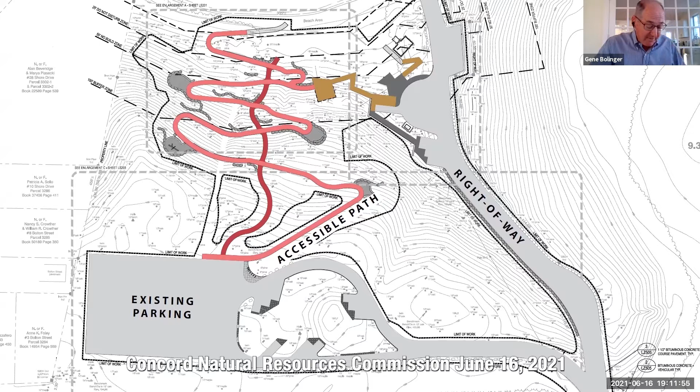We've converted all of the DMHs that are along the main entry drive, which is labeled by right-of-way on this particular diagram, to catch basins with deep sump and hoods. And this is providing additional TSS removal. We've revised the boardwalk alignment and the overlook in order to avoid additional trees. We'll talk a little bit more about that.

I'm sorry, Gene. Gene, if you can just speak up a little bit, it's a little difficult to hear you. Okay, very good. Gosh, I feel like I'm shouting, but I'll try to do that. Okay, and please raise a hand or just interrupt again if I'm speaking too softly.

And then we're mitigating whatever work that we've been identifying in the 25-foot zone, the 50-foot zone, and of course the 100-foot buffer zone, primarily through additional planting of trees, both evergreen and deciduous, and understory shrubbery. And then I think everybody's aware that we've made some fine tunes to a really, really robust stormwater management system in relation to some of the comments that we've had from the town engineering department.

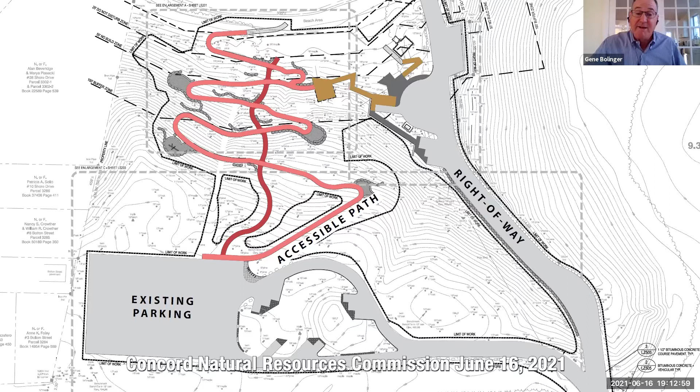So in regard to some comments from engineering, everything had been resolved to their satisfaction with the exception of 4 very minor items. And we've been in contact already with responses on these 4 very minor items, and I think that we're in complete alignment now. One of the questions was whether in fact the plans were consistently showing the deep sumps with the hoods. And in fact, they are. So we've clarified that.

And there was a comment about the stormwater capture structure, number 1 versus number 2. There's a little bit more water that's actually flowing into structure number 2. We've adjusted our calculations in response to that, and the structure is able to accommodate that in very good order. And then there was an underdrain referenced on one plan. It was a rogue underdrain. It's not part of the project. It's being deleted, and that was in response to a question from engineering.

And there was an indication from engineering that we should include, again, a sump in the most westerly trench drain that's shown on the site plan. And in fact, we are doing that as well. So those were comments from engineering that came in just a couple of days ago, June 14th.

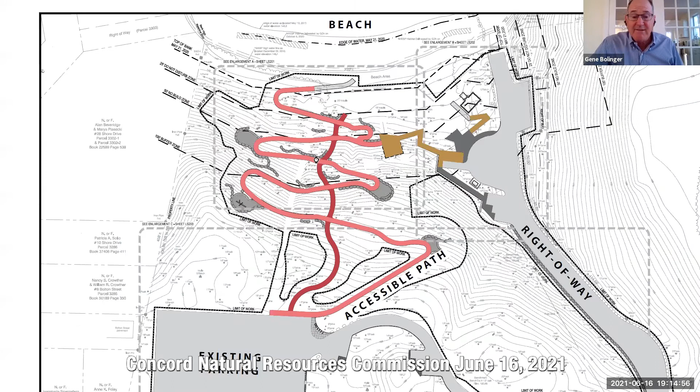And then Delia, you shared a couple of thoughts just yesterday with us in response to the latest information that had been provided. One of them was about the boardwalk encroaching a bit into the 50-foot no-build zone. And in fact, we are encroaching by 23 square feet. It's not requiring excavation. And we're doing it in order to avoid trees, get the length of ramp we need to accomplish the grades we need to meet in order for this to be ADA compliant, and to have something that's aesthetically compelling. So in fact, we are 23 square feet into the no-build zone. And we're proposing to mitigate that with some additional planting.

And you also made a comment about the lifeguard shed. In fact, under current conditions, that is also in the no-build zone. We were shifting that a little bit to accommodate the geometry of the boardwalks, and a little bit more of that is in that zone under the proposed condition. We're not considering it a permanent structure. There's no foundation. It rests on concrete blocks, and it's within an area that's really beachfront with little or no disturbance resulting from situating the structure in that particular location.

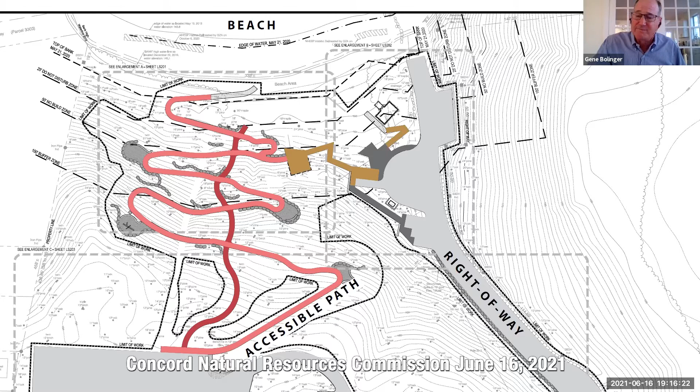Are people hearing me okay? Should I continue on, or should I stop the flow for questions? I was going to speak for just a couple of more moments. I think it's fine. Okay, very good. It's one of the things about doing this virtually. It's hard to read people's expressions and see if anybody's raising a red flag or anything like that.

Excuse me, how many trees total will be cut down in this current plan? Please.

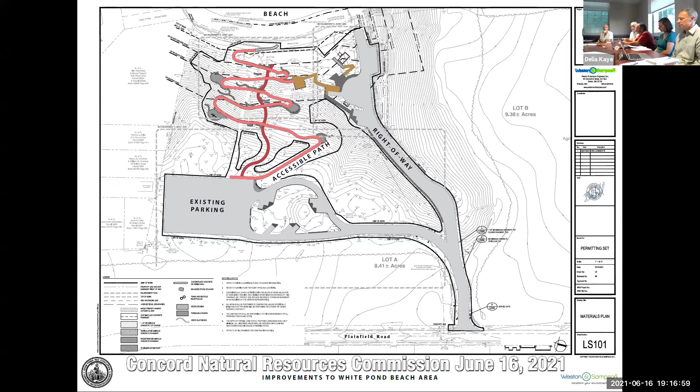Let's save questions until after the presentation and the commission has had some comments. Oh, I thought he just offered to allow us a question. Could I use this pause time for questions? No, just if the commission or Delia had a question. Forgive me, I was speaking to the commission. Excuse my interruption. No questions.

No problem. Okay. So on June 7th, we actually submitted the formal waiver request for the 25-foot no disturb zone, the 50-foot no build zone, and the 100-foot buffer zone, indicating the impacts within those areas and proposing that the mitigation be in the form, again, of a very ambitious and aggressive planting program that includes native deciduous trees, evergreen trees, and understory shrubbery.

And then we also, on June 7th, submitted a rather detailed response to letters or emails that had been received from multiple abutters to the White Pond swimming amenity. And a high level summary of that: we've provided information in regard to the boulders that are being used. And yes, these boulders are being placed within the zones that fall under jurisdiction of the Natural Resources Commission. But they really match boulders that are out there under current conditions, if in fact they're not actually boulders that are already out there.

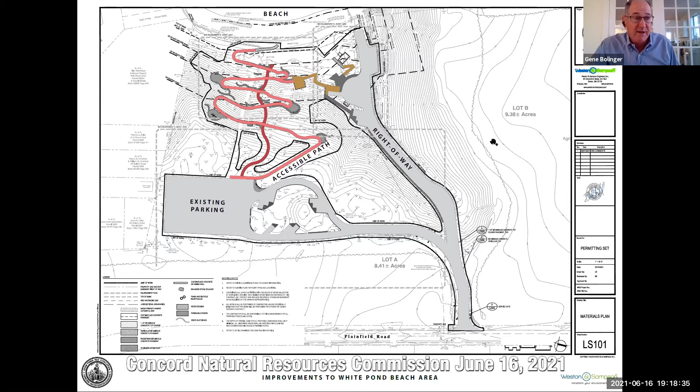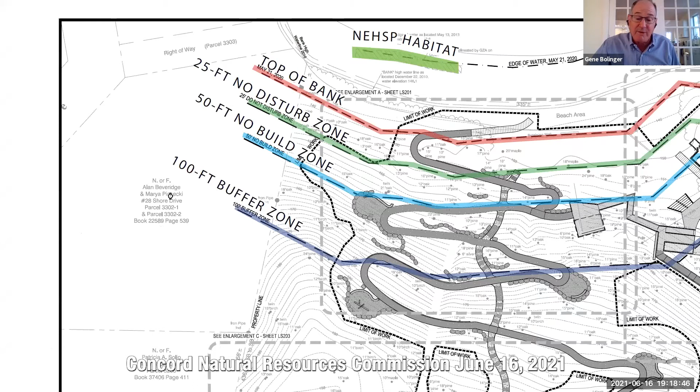There was a suggestion to change from a fixed canopy to a lighter canopy. We've gone to a fabric canopy. We've adjusted the railing system on the decking, the boardwalk system and the overlook so that it's not a heavy wooden rail system, but a much lighter cable style railing. We have adjusted the boardwalk as requested by multiple residential abutters in order to avoid the need to remove additional trees. So we are down to the removal of 9 trees across the breadth of the project improvement area.

We've modified a stone retaining wall that's shown very central to this view right here, that trapezoidal shape, by installing a bench on the front face of the stone retaining wall. So it reduces visual impact and provides value in the form of seating. We eliminated a staircase off of that overlook as one of the abutters suggested. The staircase is provided adjacent to the drop-off area. So those were some of the changes in response to the abutter questions.

And then just today, we received some questions from another abutter. There were 4 comments. One had to do with the color of the asphalt pavement. I will just say that asphalt pavement fades very quickly. And in our opinion, based on leaf litter and so on, it's going to blend into the ground surface of this woodland landscape quite readily and in very short order.

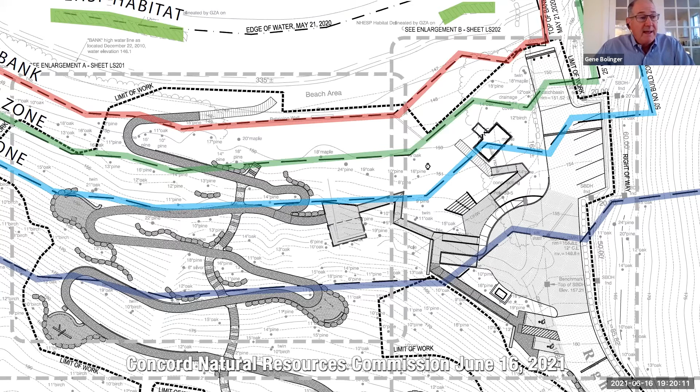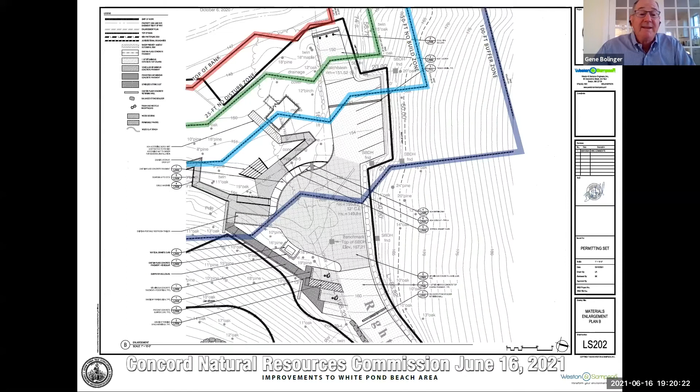There were some comments about planting within the jurisdictional zones and a suggestion that some of the trees we were identifying may conflict with existing vegetation. Lainey, can you go to the last plan in this set? That is the landscape plan. And maybe zoom in a little bit towards the beachfront. One of the things you typically do on a construction set of drawings is indicate that the contractor or landscape subcontractor is required to stake the locations of all the tree and shrub installations.

That allows you an opportunity to shift the location slightly so that you're not immediately adjacent to another tree or a sapling that wants to be retained or a group of shrubs. So I would offer that as a response: if we have some amount of flexibility, I would take lead from you folks in regard to when we would report back to you on having to adjust some of the vegetation installations. It's impossible on a landscape plan of this nature to pinpoint precisely every location of every piece of vegetation being installed. So you have to reserve the right to shift slightly while maintaining the intent.

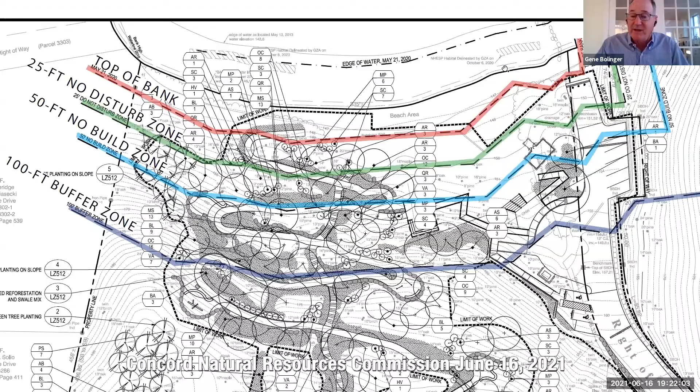And I think there was also a suggestion that some of the groupings of understory vegetation be shifted in order to better control views off premises to private abutter properties that are located to the left on this drawing. So I will come up for air now because I know that was a lot of information. Kate, is there anything you think I'm omitting that you'd like to add at this point, or turn it over?

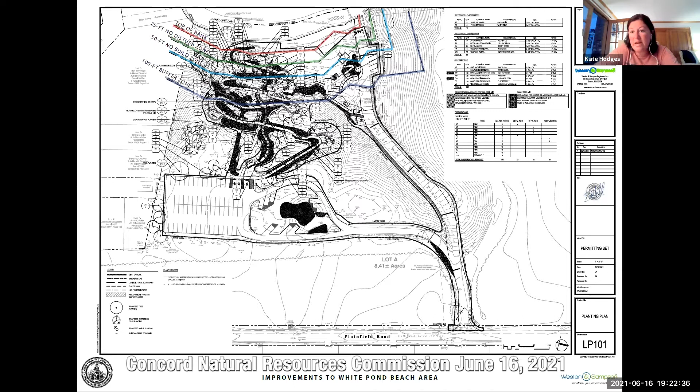No, only that, just to kind of couple back on what Gene said, I think more than probably any other project that I've worked on in the 7 years being in Concord, we have really listened and tried to do our best to have the lowest impact as far as aesthetically and environmentally that we can, while also being compliant both with code, the Architectural Access Board and ADA,

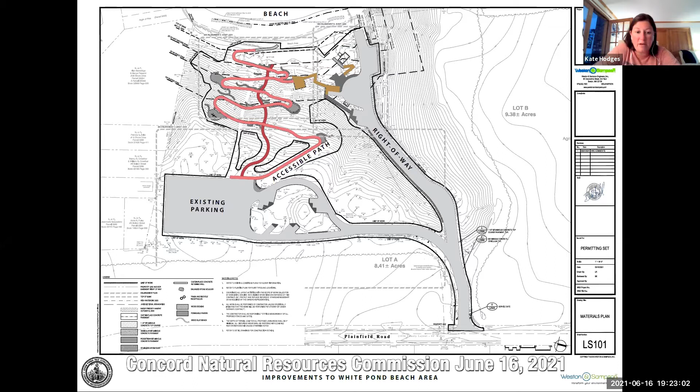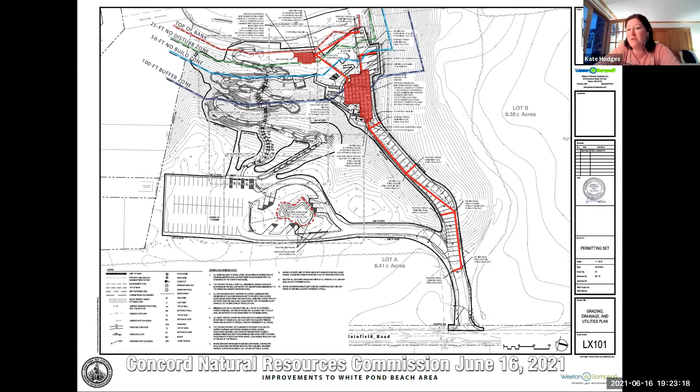and then really trying to create the most robust stormwater management system, which we really hope will reduce the occurrence of the blooms that we're currently having, but also all of the other things that happen in and around the pond that really work to harm the resource area. So the entire plan is with that in mind. We're not trying to have anything that is more showy or robust than what we have, but we also want to make sure that we're being responsible for the property. Okay, thank you.

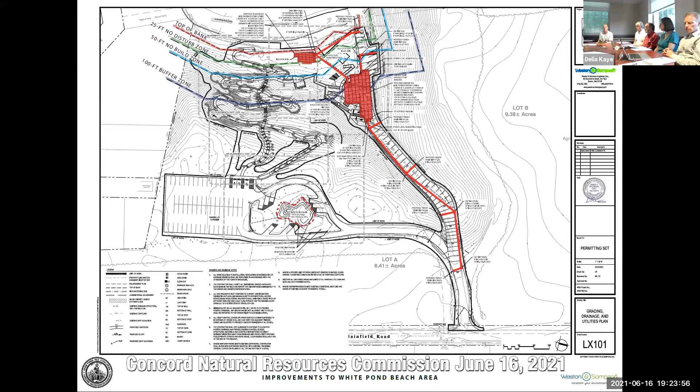Well, I guess I'll just kick it off with a quick comment, really for the commission, in regard to that 50-foot no build zone. As I understand it, top of bank is somewhat artificial, if you will. I know Delia explained that's really how the code reads, establishing the top of bank, but it seems like it does push it back further than it may normally otherwise be in terms of the point of water.

So it seems like the incursions into the 50 by that 23 square feet and partially by the small building there seem, at least in my eyes, given all the benefits of the project, and that top of bank location where it might be further towards the water, acceptable in terms of just balancing everything here. I just wanted to solicit the commissioners in terms of their perspective on that.

I'm sorry, could I just say something? Sure. So we took it upon us, honestly as an educational exercise for myself, Ryan, and the rec department, to try to measure what we thought was the water line over the past 2 years. And we haven't actually come within 10 feet of the top of bank during the summer or swim seasons. Now that doesn't mean that we don't come into contact with that during the rainy season or when snow and ice comes there. We certainly haven't done our due diligence in mapping that out,

but the idea was the top of bank comes where the average is, so that if you were in an assisted device, either a wheelchair or some type of walking device, you would be able to reasonably get to the water's edge. So I think it just speaks to your point, and I wanted to let you know that we've tried to do some homework to figure out what is the average that it comes up during the summer months, and that's where we've been at. Thanks, Kate. Appreciate that perspective.

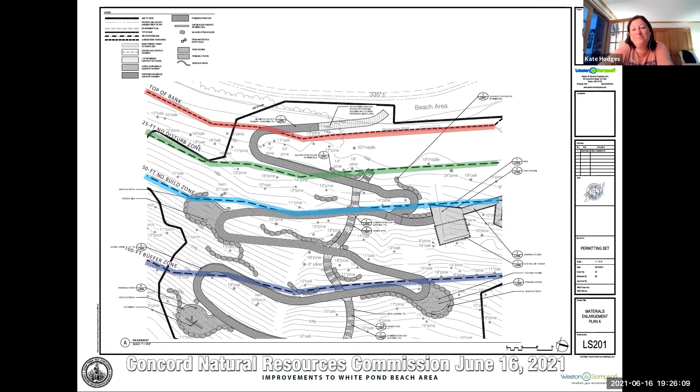In that regard, I don't think it's overly germane to get in the habit of having the petitioner go out there and tell us where anything is. Right. And no offense, Kate, I have no objections to what you're asking for. None taken. I think the overall benefit to the public ought to be brought into play here, and there's an overwhelming need to have this done, and I think we ought to just justify it along those lines. I don't know if a waiver is needed for this. It was provided, it's in there.

Yeah. Then I wouldn't want us to vote hanging our hat on, well, our regulations say it starts here. Sorry guys, it starts here, and we've got 24 feet. I don't think we're gonna live or die on 24 feet. I agree. And the public benefit is certainly worth saving. If they've saved a couple of trees inside the 25, we've come out ahead. So I'd rather go that route as far as justifying our vote. Yeah, I don't know how others feel, but I agree. I think the public benefit is the overwhelming factor in my mind. No concerns from me. Me neither. Good, Gary. Okay.

I didn't have any other particular perspective on it. It seemed like he did a nice job responding to the commentary, whether it was from Public Works or ourselves or abutters. At least I can't speak to all the abutters, but it certainly seems like you addressed a fair amount of those concerns. So, the other thing I didn't quite get is planting the shrubs and trees.

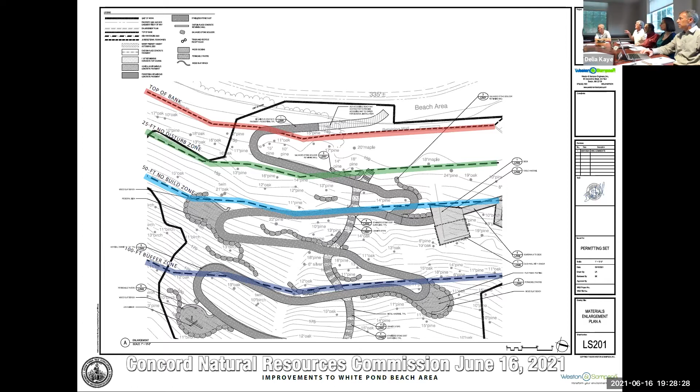Any other comments from the commission? Okay, we'll turn it over to any public comments in regard to this application. Delia, do you see any? I do not, but Jean, if you can stop the share on your screen. Nick had a previous comment about trees. Remind him now is the time. Thanks, Laney. Okay. I have a comment.

Yes, Carmen, please. Carmen Jacquier, 38 Shore Drive, formerly of the White Pond Advisory Committee. I really appreciate how you have adjusted down by the water with the pavilion and the walkways and the elevated wooden walkways and saving those large trees. That's really great to see. Thank you, Kate. You're more than welcome. Happy to do it. Any other public comment?

Nick Johnson from 38 Bolton. Yes, Nick. So, just from my understanding, is the commission the deciders on how this gets done? The public is just relying on them? This is Delia Kaye, Natural Resources Director, and there have been a number of public forums where this project has been discussed. This is coming in front of the Natural Resources Commission because it is work within 100 feet of a wetland resource area. The approval the commission is giving is on the plans that have been presented, are on our website, and have been discussed.

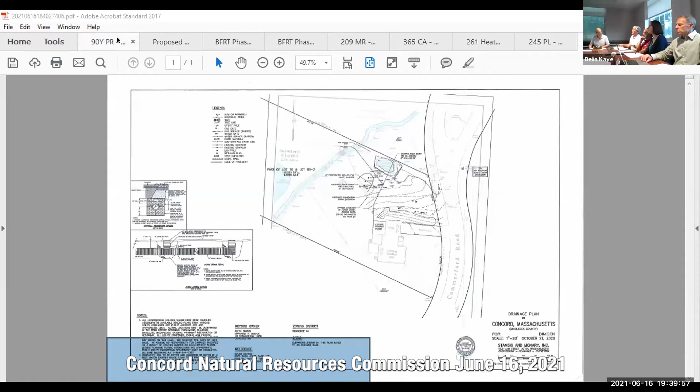Yeah. Okay, next continuance, let's see, 399 Lowell Road, DEP file number 137-1546. And Julia, you're going to be discussing that with us this evening? Yes, I am. Hi, everyone. Just before you start, Julia. Sure. I'm going to recuse myself from this. I don't think I have to leave the room. I think it's a minor thing, but I think so. Okay, thank you, Greg. There we go. All right, the floor is yours.

Okay, well, again, just like the last presenter, I had no idea that you guys were meeting in person or I would be there, but I'm so used to Zoom that this was just what we did. Anyway, so thank you for putting up with the remote presentation. Not at all.

So as you remember, I hope, we have a very messy, invaded part of our 4-acre site that is in back of our finished lawn area. And it was already built and used probably, I don't know how many years ago, but it's just very overgrown. It has an old pool foundation and a building foundation. And we would really like to clear as much as we can for a meadow, and then also take down, this started with this downed treehouse that you see in the upper left corner, where a treehouse took 4 trees down. So it's a big mess with boards and nails and everything.

We'd like to just, even though it's in the no disturb zone, we'd like to just clear that. And then we got thinking, we had already planned for a meadow up to the existing woodland, but that existing woodland is really full of pachysandra and garlic mustard and all kinds of invasives. And we'd like to bring that wood line back to where you see the little green circles. I'll explain the entire planting list, but those are basically where we'd like to put some flowering trees, crabapple or hawthorn, whatever's available, and low bushes.

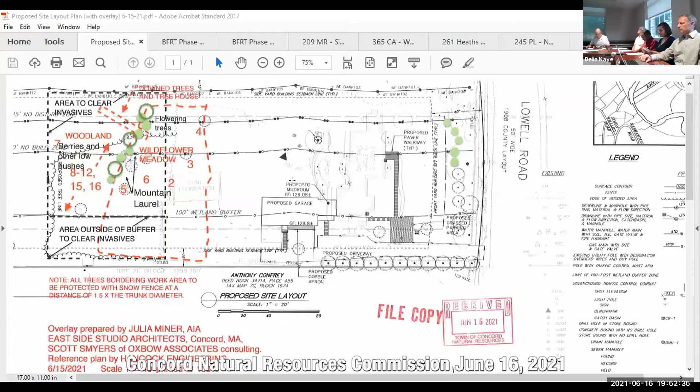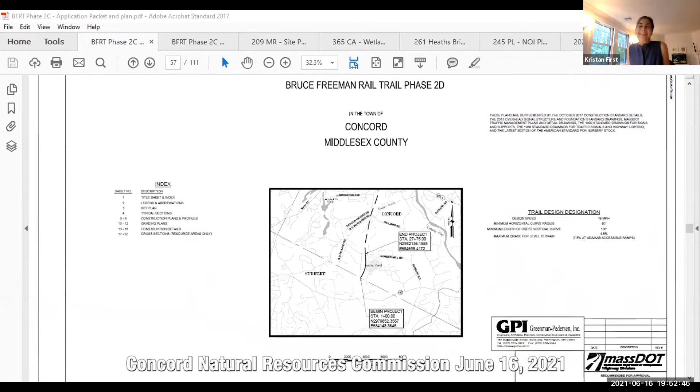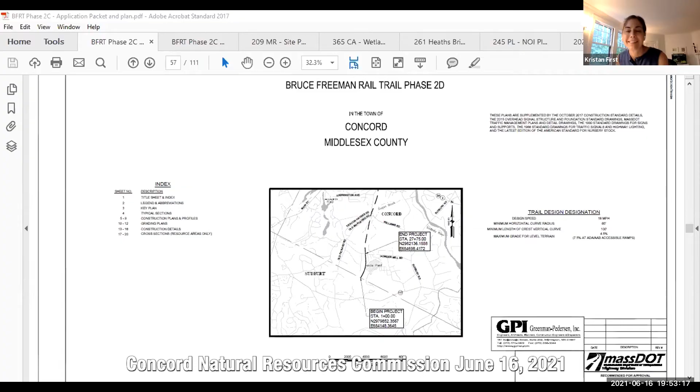Kristan, are you here this evening? Yeah, I'm here, how are you? Good, how are you? Good, thanks. Okay, that is definitely not my project, so I'll just wait. Can you see that, Kristan? So I'm seeing the Bruce Freeman Rail Trail. Okay, so I apologize. That's okay.

Based on the feedback from last time, I haven't made many alterations, but there were a few. The first was that the driveway, I made an effort to shift it towards the house as much as possible. It would improve access in and out of the garage if I can move it that way. Gets it a little farther from the wetland, but I cannot move the entrance to the driveway any further. In fact, that may shift, I'm just waiting for input from the engineering, but this is as far as I can shift it.

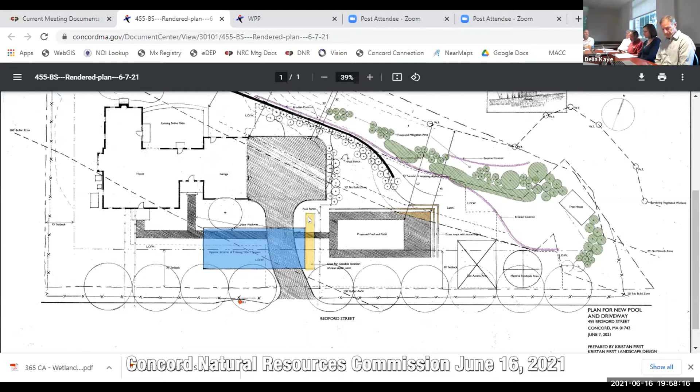We'll shoot for that, and if it becomes problematic, we can continue. What if I could get it done before then? Sure, if you want to be at the July 7th meeting, that means submittal by June 25th. Oh, okay, so it's every other, so it'd be July 7th or July 21st. Let's say July 21st then. That means your materials would be in by July 9th.

All right, everybody's busy, really. Okay, that sounds great. I just want to make sure. Kristan, anything else you'd want to add?

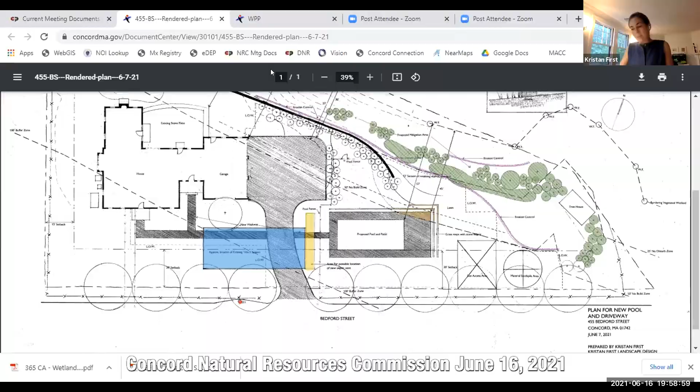No, I just had updated the impervious calculations, but that will obviously be updated by the engineer. I added the information about the existing patios and I'll make sure he includes that, so that it's registered on the drawing.

And I had a conversation with Delia about erosion control. I'm trying to understand where the limit of work is, whether the planting in the 25-foot zone counts as area of work, or whether I keep the limit of work in the 50-foot zone with just a minimal amount of work in that 25-foot zone. Ideally, what you'd show, Kristan, is your actual limit of site work with an erosion control barrier there, and also install one at the base of where you're doing the plantings and invasive species work. I did indicate that on this drawing, I have two areas.

I think that's everything. Thank you, I think you hit all the high notes, at least from my recollection, in terms of the breakdown of the areas and so on. So I don't have any further questions.

Any of the commissioners? I had a question for Delia about the plant spacing recommendation, 5 foot on center. What does that mean exactly? It means you'd assume a shrub planted 5 feet on center would occupy a 25 square foot area - if you did pi r squared it's slightly different, but you just assume that 5 squared area is what encompasses a full-grown shrub.

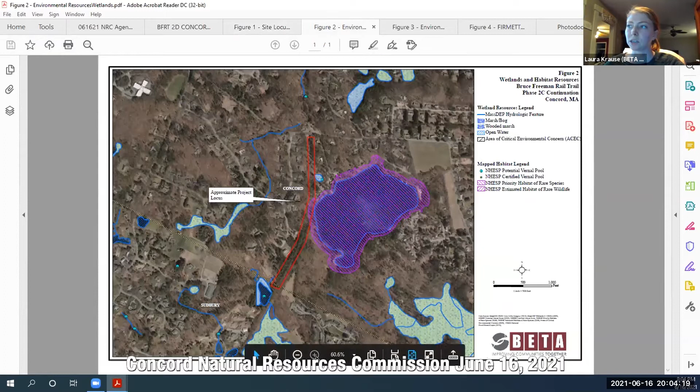In terms of resource areas, there are two primary areas along the project that are of concern. The first is White Pond, and the second is this certified vernal pool located here.

These areas will be protected using erosion controls consisting of compost filter tubes and silt fence. We did add some additional silt fence to the erosion control detail per the request of Delia, because the slopes are pretty steep out there, so that will provide some additional protection.

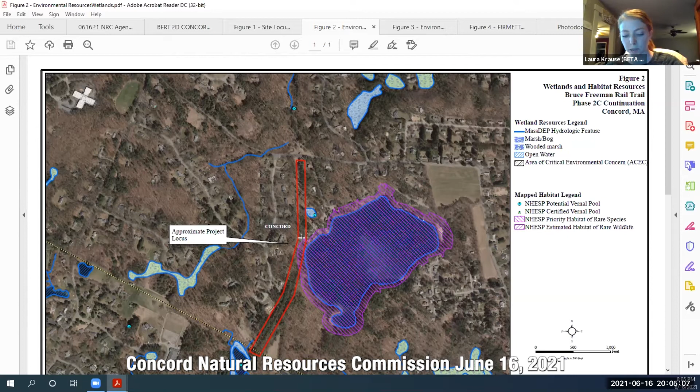The trail also travels through mapped habitat, and we did file with MESA, and we did get a no adverse effect determination from them. As you can see from the project plans, the project is within the buffer zone to White Pond, as well as the 50-foot no build zone to White Pond.

The total impacts to the buffer zone are 8,177 square feet, and the impacts to the no build zone are 228 square feet. Those impacts are associated with installation of an ornamental fence, slope grading and landscaping, planting, and erosion control installation. That work is all temporary within the no build zone to White Pond.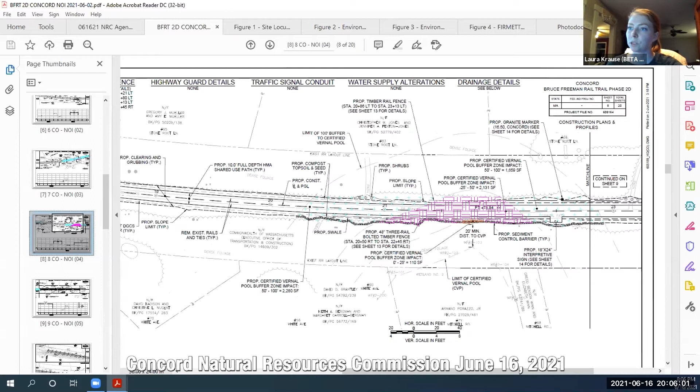The project is also within the buffer zone to the certified vernal pool and vernal pool habitat. The project does encroach on the 25-foot no disturbance zone by 110 square feet. Again, that work is also temporary, associated with grading and installation of erosion controls.

There's 2,131 square feet of impact to the 25 to 50-foot no build zone. Those impacts are associated with 115 linear feet of the trail, as well as the shoulders, grading, construction of a drainage swale, and installation of erosion controls. In total, the impacts to the vernal pool habitat on the property are 6,180 square feet, including the impacts to the no build zone and no disturb zone.

As the bylaw allows construction of publicly maintained trails that restrict motorized vehicles, which this project is, the project wouldn't be subject to the presumption that work in the buffer zone would impact the resource areas. However, we have requested waivers for work within the 25-foot no disturbance zone, 50-foot no build zone, and the 100-foot vernal pool habitat. We provided an alternatives analysis showing that the project is located in the best location to minimize impacts to resource areas and wildlife habitat throughout the corridor.

Shifting it further away from the vernal pool and from White Pond would have resulted in substantially more clearing and more impacts to actual habitat that species are using, whereas we centered it on the existing rail bed to minimize the amount of grading needed for the project, as well as minimize the clearing necessary as well.

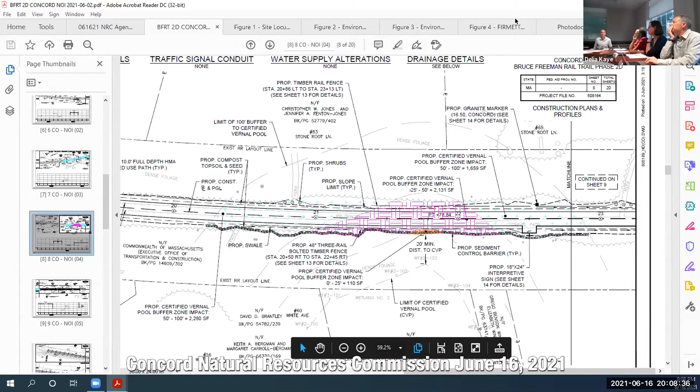Thank you. Having looked at the set of plans, my only comment really is I thought it was a very good set of plans. All the details seem to be tight. They all seem to correspond with the plan itself, the cross sections. It was very clear, and I thought the waivers were well thought out and well written. So I frankly don't have any comments of significance on the application this evening. Do any of the commissioners have any comments?

Nick? Yeah, I just had a question about the vernal pool. Is there any ongoing monitoring? It's a delicate area, and I'm wondering if there might be unintended problems that pop up down the road that could be corrected if the situation were monitored.

So I guess I'll jump in on that. Delia, Natural Resources Director. So we did do a big night way back, like in 2007, to see what vernal pool species were moving where. I would have to go back and see whether we saw critters moving from that vernal pool, Hartley Pond. We did from the vernal pools north of Powder Mill. I remember that, but I don't remember if we saw them. If we did, it was wood frogs and spotted salamanders.

And we had Bryan Windmiller look at it to evaluate whether or not the rail trail being paved would be problematic. And he took a look and he sort of said, they're going to cross anyway. The daytime activity is not going to be problematic. These species are crossing at night. So, on roads, I think it's always good if there's the bucket brigades with the salamanders being moved across because cars are going all night long. But with the rail trail, there shouldn't be a lot of activity during the vernal pool season.

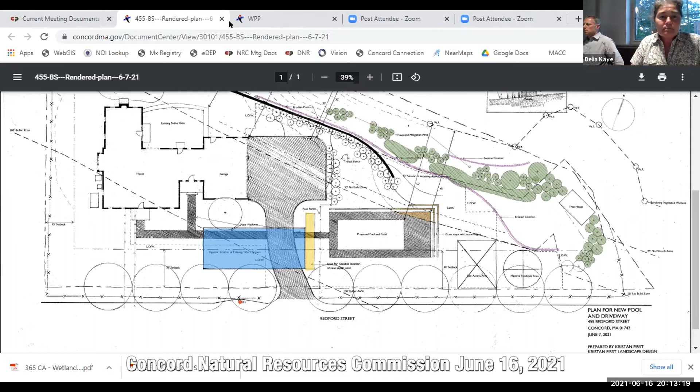Is it substantially changed from what we already have? No, it's just colored. Oh, okay. We can use the one we have. Yeah. Let's look at it. Nice color, but I don't need it. Are you trying to forward that to Delia? Yes. Okay. See if it works. But yeah, I can use the black and white. That's fine. Give me one second. I for some reason have two screens.

Do you have a laser pointer for him? Yes, I do. I used to have one. It's just the first time getting back. We're a little rusty here with the laser pointer and whatnot. That's a good point. Trying to bring it back to life. Get the dog in the house and go to bed, you know? Oh, there you go. Yeah. I have a plan.

Still don't have the email, so I don't know if you just want to start. Yeah, go ahead. Okay, go for it. Yeah, you can go ahead. Dustin Wang from Creative Land and Water Engineering. Haven't been here for a while.

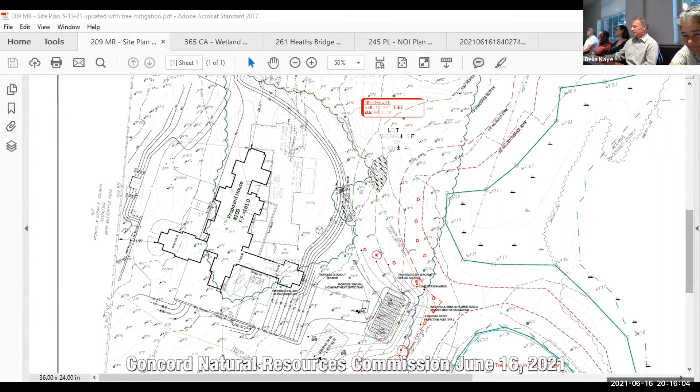Doing great. So Sheng and then Peter Fallon from Fallon Custom Homes as applicant. So this is existing. There's an existing house in a light shade, and you can see the existing edge of the clearance right now. So this is all existing clearance. The dark solid is the wetland line, and the first dash line is the 25-foot no disturb zone, and then the 50-foot no build zone. And then we have a 75-foot, and then this is a 100-foot buffer zone.

So the entire proposed work, except the septic leaching field, is outside of the 100-foot buffer zone. We counted 9 trees will be removed in the 50 to 100, and in the new one we probably can even save 1 more, so reduce to 8. The cross with the circle around it is the trees we're going to save. And then we propose 10 trees to mitigate, 2-inch caliper, around the cleared leaching field and in the space between trees.

Actually the woods are between the cleared area, so there's a tree buffer between the existing house and what must have been a farm, and people cleared around it. You can see this area is all existing clearance, including probably part of the wetlands, because a stock fence goes through the wetlands. Hopefully that can be eliminated under the proposed condition. The new house is all out, and we are going to cut some trees outside of the buffer zone area. All the trees are labeled and surveyed.

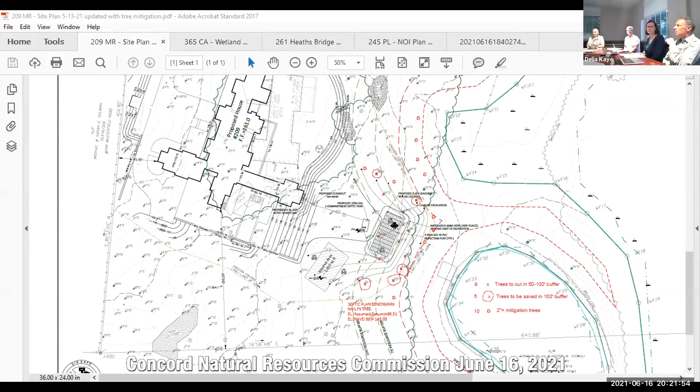Can I ask you, on the plan, why didn't you use a reserve area? Wouldn't that have almost precluded you from having to be here? So my client, who grew up in Concord, is moving back and bought this land where somebody else had already designed a septic system. The holes were already dug prior to us being involved. We had no control over where the system was located or how it was designed. But you could have... I didn't know whether it was a lawn and you didn't want to put the system there.

Or it was pre-existing. I thought it was pre-existing with components that could be saved. That's how I read it. Sorry. Thank you. Just because the microphone is up here.

So I can't really speak to why they dug the holes and did all the perc tests in those locations. But I've had a long conversation with the person that did it about why. It was his observation, looking at the site, with best soils, ledge outcroppings, and the involvement with trees. And we had moved the house forward, so there will be more land behind the house, taking the existing house down, so as not to go any closer to the wetland area.

Oh, no, I get it. I just thought the reserve area had deep holes in it and everything, you just shift it there and you're good to go. You're using somebody else's plan going forward because it already exists. Right. I just wanted to know the answer. It was a good question, definitely.

We thought about it. Believe me, as soon as I saw what they purchased, I had all those same questions for the person. And he walked the property and decided this is the most appropriate place to dig and do the perc testing. As a civil engineer, I probably could, but I didn't get involved with the soil testing. It's just sometimes you may have an area outside of the 100-foot buffer, but you could have bad soils, which doesn't work.

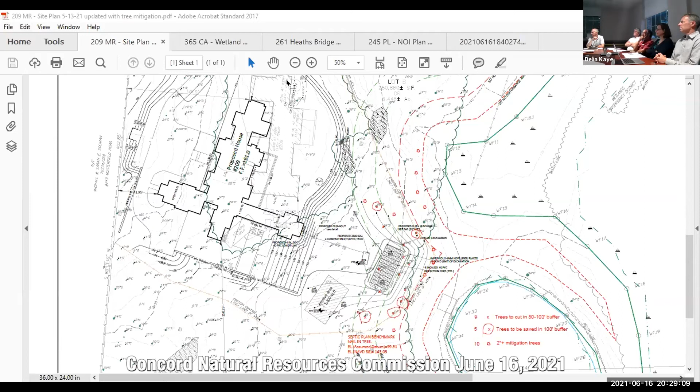So if I understand right, basically we can almost clear up to the 100-foot buffer to get the D-box or the leaching area ready. So just a way to clear these 8 or 9 trees. Maybe after we go to the site, we may be able to save 6 of them, because I look further, I think 1, 2, 3, 4, 5, this tree may be able to save. It's right at the thicket edge, but maybe it will hurt the roots. So that's why I didn't try to save it. I have to look at it.

Right, I have an arborist that's already been to the site. If we need some kind of written explanation, I could do that as well. I have no problem with that. We just need to get whatever species are cleared, and then we can propose the in-kind replacement and the tree protection on the plans. Are you going to have a steel fence, a chain link fence? Steel fence is what's required. And we just want to see that on the plan for the trees that you're proposing.

Okay, so we need to get the detail to me, and I put it into the plan. We've been doing 1.5 feet per inch caliper. Okay, I didn't know that's what we're doing with the other fence. Chain link, I know what it is. I will get that detail. So as long as you can get us that by next Friday. If you can get that, what about your landscape plan?

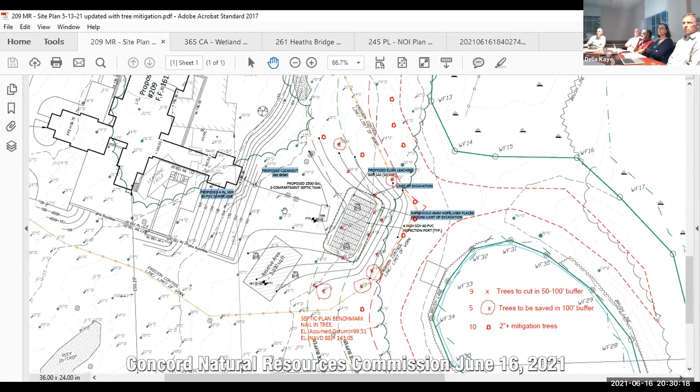Unfortunately, again, it's out of my control. The clients live in California. She grew up in Concord and is moving back. So the communication has not been as simple, in terms of Zoom meetings and all that. See if that's acceptable, maybe, Peter. I can go to the site.

I'm a wetland scientist, so I can go check the trees. The answer is I'm probably not gonna have the landscape plan completed for you. So I get the species and write it down, something to show you. Say it's 8 or 9 cut down, red maple, red oak, white oak, hickory, whatever it is. Then I can propose the replacement.

And for the replacement, we'll talk to Peter, and then he can talk to the arborist. If we all agreed, we want to be consistent on the tree plan and on this conservation plan. We will incorporate the same tree protection detail into this plan, plus the list of the trees. And from my buffer perspective, if there's any intrusion into what we decide here, I'll come back again if the landscape plan is in conflict with any of this.

So do you want to just leave this open until you've got your landscape plan finalized? That would be my preference, as long as I can get a building permit. Yeah, you're fine. So do you want to continue it to the 7th? I would continue to the 7th. That's fine. And then beyond, if you need to continue.

Again to the 21st, maybe further along. I've been kind of excluded from those meetings, so I have a landscape plan that no one's approved, and I'm reluctant to give it to you without any client approval. Yeah, makes sense. We can give them feedback, just in this buffer zone area. Right, well, I've heard everything they said. I think we're clear what we have to do.

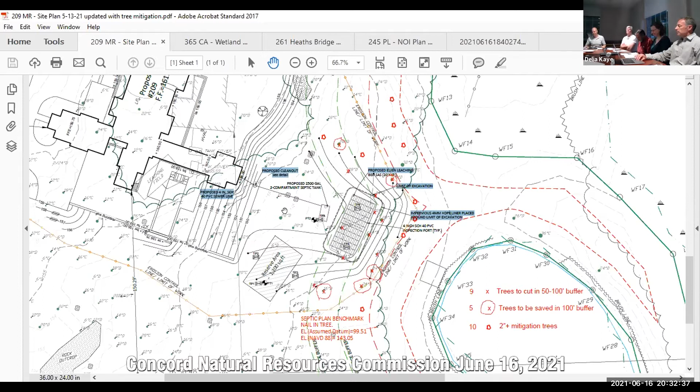Thank you. Thank you for the pointer. Oh, you bet. Thanks for returning it. Yeah, I usually have a habit to put it back. Everybody does. Thank you very much.

All right, moving on. 365 Commonwealth Ave, DEP file 137-1568, Concord Housing Authority. Evening. Hi. My name is Nathaniel from Stamski. I'll be talking about that one. Thank you, you're free to go.

Should I share my screen, or are you taking care of that? Okay. Like I said, my name is Nathaniel, I'm from Stamski and McNary, talking about the project at 365 Commonwealth. The vast majority of the property, except the very frontage, is within 100 feet of bordering vegetated wetland, located on the west edge of the property. The property is also bordered by Warner Pond, so there's bank and land under water associated with Warner Pond.

There's also floodplain with a flood elevation of 123.8, and the 100-foot buffer zone projects onto most of the property. This is a 1-to-10 scale plan, so it looks a little different; people are probably used to 1-to-20 scale plans. The current property has a single family dwelling, gravel driveway, porch, concrete sidewalk, walkway, back stairs, and other minor things. The project is to create a second dwelling on the same lot, shown right here.

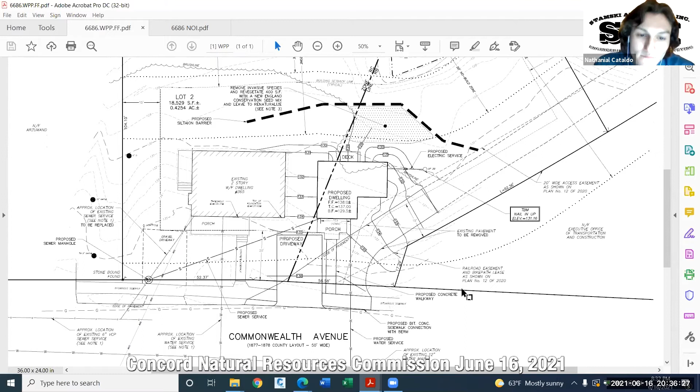I think those are all the major points. I'm happy to take any questions.

Okay, thank you. So I think what's probably lacking from the plan is a formalized mitigation plan by way of the invasives. So you have someone on board, or you'll be preparing that?

No, for now, we had just marked it as invasive removal and just wetland mix. We didn't have a specific wetland scientist approved plan or anything like that, or a specific plan.

Well, I think we're going to need something that demarcates the invasive removal on the plan, whatever the 400 square feet is defined as. And then I think we're going to need your protocol in terms of how you want to go about removing those invasives and so on. It's very typical on any of the invasive mitigation.

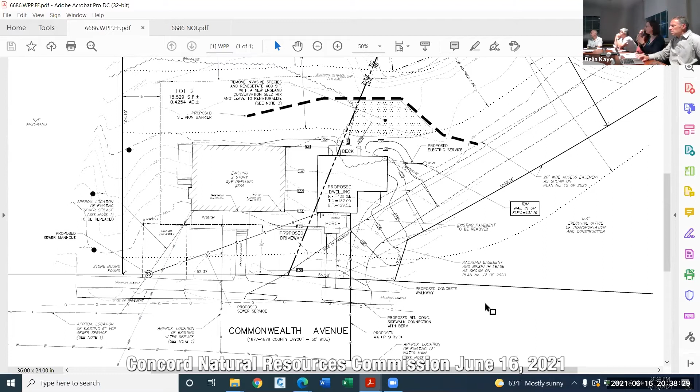Oh yeah, so you want me to show? Okay, so this is Commonwealth Ave. This heavy line here is the edge of pavement for Commonwealth Ave, or actually, well, that's the property line. This faded line here, edge of pavement right here, is the edge of Commonwealth Ave.

Okay. I didn't say porous driveway. Sorry, I don't know if I misspoke. It's a paved driveway. That's right, this box right here. Yeah. And then the

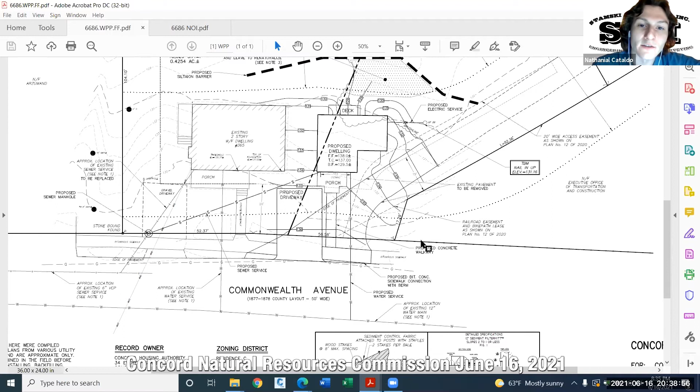pavement that's being removed is this kind of curve up here, which meets the dash line, which is the trail. And that's being removed, but some of it is being overlapped with the walkway and driveway.

Where are the roof drains? What are you doing with roof water? It'll be captured in gutters and sent down downspouts. No specific mitigation for that.

So you're not doing any, the system is just going to drain onto the ground? Yep. No dry well or anything, or just?

Yeah, I would think some type of French drain or some kind of crushed gravel. Have you figured to keep? Have you done the math to make sure it stays on the lot?

It's not subject to a full stormwater analysis, so that's why there's nothing like that. But I mean, based off the grading, it fits into the natural grade as close as possible.

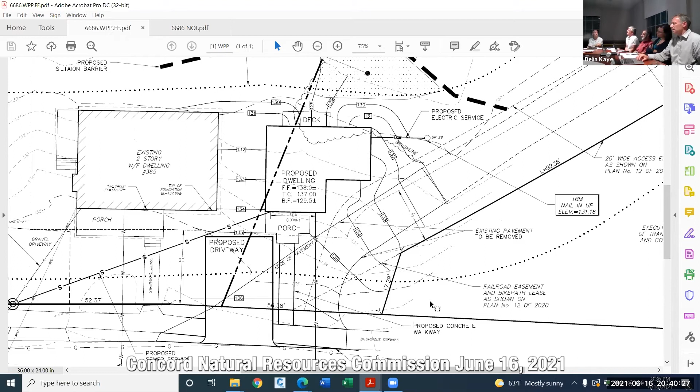So most of the runoff will follow the grades and head towards the west edge of the property, towards the pond or wetland. It will be accelerated given the fact it's put in downspouts and whatever. Right, and heading downhill, right? I mean, customarily, we would see that addressed as to what you're doing with that.

I do commend you for not pushing the house right on the 50-foot line. This is the first one we've seen where you've actually kept it off at 50. I got to compliment you on that one. Closer to the rail trail and everything, and you didn't push it. Kudos, by the way.

Thanks. Well, usually it's over and we push it back. It's the same line as the house, right? Any other comments from the commission?

Yes, Delia. So I just have a question. The application does state, I'm fairly certain, that it's a porous driveway. So are you proposing it to be something other? Is it asphalt? I'd have to check. I don't think I mentioned it was porous driveway. That's where you noted.

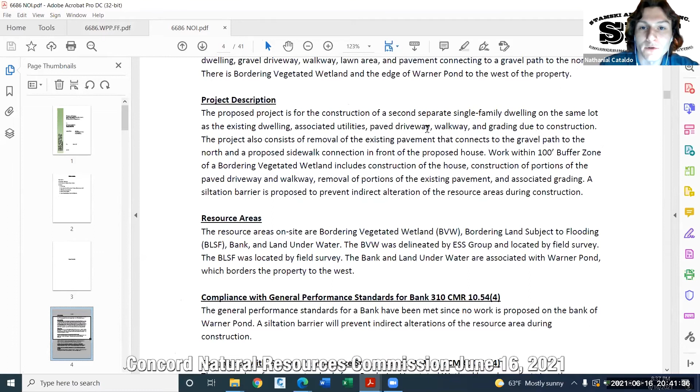Okay, so can you just go back to the drawing for a second? Is it possible the driveway just seems, is it possible to narrow it up at all, or? I was going to say, what is the width of the driveway? So it's 18 feet, which is pretty minimal to serve 2 cars.

It's even smaller than this house's driveway. Yeah, so at 18 feet you get two cars side by side. Yeah, okay, thank you.

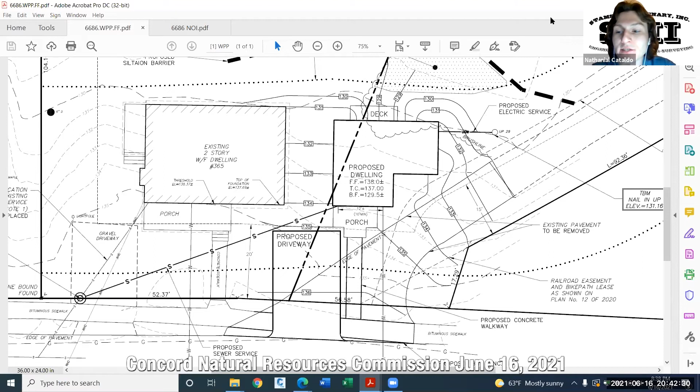Any other questions from the commission? Other than, I think you do have to answer the drainage issue from the roof runoff, whether you put something under the driveway or something like that. Yeah, we hadn't done anything specific because I'm assuming it'll be part of the house architecture or something like that, but yeah, it should be answered here.

So we'll move to public comment. Any public comment in regard to this application? Yes, please, if you could state your name and address. Rick Eichler, 14 Pleasant Street. I'm the chair of the Concord Housing Authority.

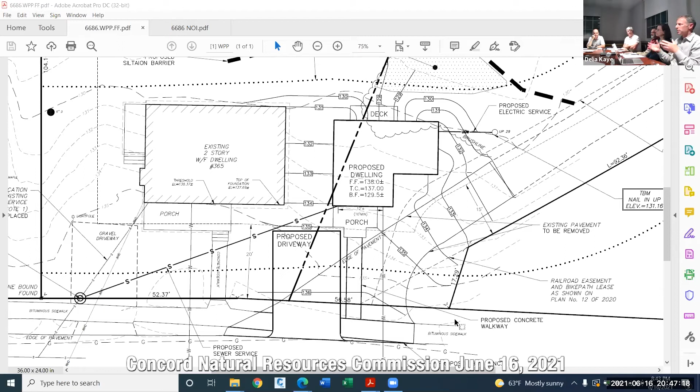Because as I look at the photo, it looks to me like it's sloping down towards the western edge. That was part of my concern - if you have water coming off the roof going straight down, especially with this invasives removal. The grade lines you see behind the house on either side of the deck are really just a landing outside a sliding glass door in the back, with stairs down. The grading behind the house is so it doesn't look as tall from Warner's Pond. There's a basement door under the deck - if those two grade lines didn't exist, you'd have a pretty flat area.

Just like if you were looking at the backyard of 365 Commonwealth - it's a fairly level backyard, and then with a broader site plan it does slope down to Warner's Pond. But there's going to be a little grassy backyard there.

I think in either case it's relatively straightforward - you just need to address the issue so it's addressed. Our policies require that you state what's happening. I'm not trying to put a fly in the ointment, but it's our function to make sure these things happen. My only concern is they were going to overbuild something. Nathan knows he should come up with something that'll work. The public benefit - I'm not telling you how to make your case - but he can make the case this is a hell of a public benefit, and this will suffice. We can live with it, but you just can't ignore the issue.

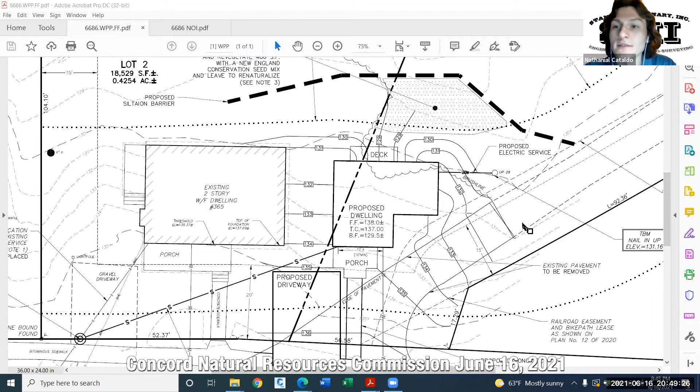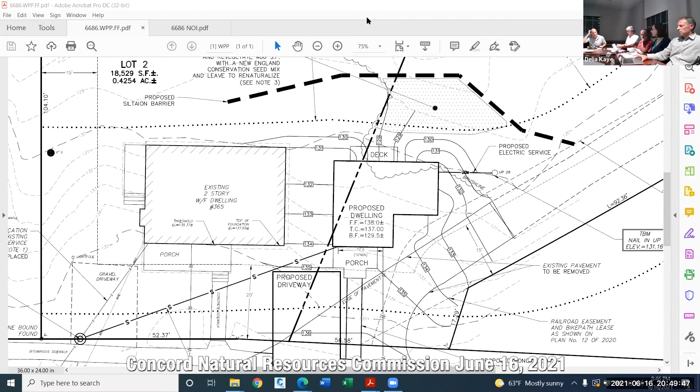Any other comment from the public? Delia, are you seeing any out there? Okay, so I guess we'll continue this. Obviously it's in front of the ZBA, is my understanding - oh, not yet? What does ZBA stand for? Zoning Board of Appeals - well, they can't do anything until they open the trail and do all that work.

So the work - we've got a long way to go. It's not like we're in a huge hurry, just getting the ball rolling. Okay, appreciate it, thank you very much. So when would you like to continue? Thanks everyone - I think you could easily give us at least a month.

Is July 21st acceptable? Well, if Nathan thinks he'll have anything by then. July 21st - you good with that? Yeah, I don't see a problem. I'm guessing submission within a week of that, right? July 9th? So that's July 9th. Perfect, yep, okay - works for me, thank you. We'll plan on seeing you then. Sounds good, thank you.

Next hearing: 261 Heaths Bridge Road, DEP file number 137-1569.

Who'll be discussing that this evening with us? I'm Rich Kirby from LEC. Hi Rich, if you could speak up, that would be appreciated. Sure, I will do my best to project my voice to your conference room. With me tonight is the applicant, Carl Calabria, and the project engineer, Vito Colonna from Cornerstone Engineering. We filed this application to demolish and reconstruct the single-family dwelling located at 261 Heath's Bridge Road. I'm sure Delia is working on pulling up the plan, or I'm happy to share my screen, whatever's easier.

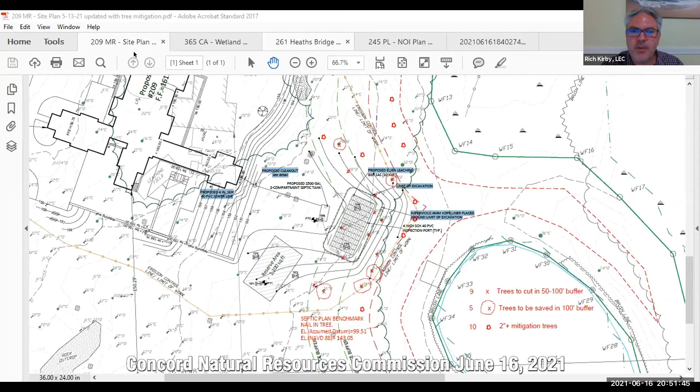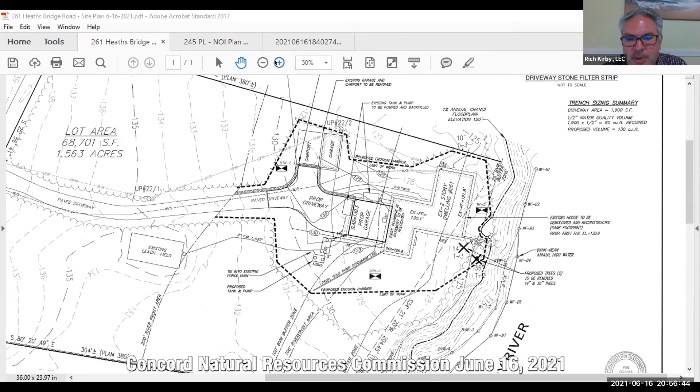I just had one primary comment. I was noticing, is it a sump pipe? Oh yes, the sump pump, running off the corner of the house, but it seems to be going uphill, and I was just wondering what that was all about. Sure. So if you go back to the plan, I'm going to let Vito explain the engineering associated with the sump pump. But right now, off the back of the house, there's a sump pump that discharges. It doesn't appear as though it runs very often, but it does discharge groundwater directly to the slope into the Sudbury River. So we're proposing to relocate that and pump it as far uphill as we can away from the river, such that it has ample room to infiltrate over the existing landscaped area before it goes to the river.

Do I have that right? If you're building a new house, why are you needing a sump pump? Where's the water table and where's the basement floor? Yeah. What are those elevations? So this is Vito Colonna, just chiming in. So every house basically needs to have some type of foundation drainage. And right now they already have a sump pump in there. It doesn't run very often.

So in the proposed house, they were just going to basically mimic that same condition. Groundwater in the front of the house was relatively high just because the soils were pretty poor. But they are so tight that not much water actually transmits through them. When we dug the test pits, the sides were wet, but nothing ever even dripped to the bottom of the hole because the soils were so tight. So I can see why there's not much flow in his sump pump now.

But to get above that water table, we'd have to bring the whole house up, the basement floor up about 8 feet or so, or 7 feet up. So we wouldn't want to do that. We'd want to just leave it as it is now. He hasn't had any water issues as it is, but we do have to have some type of foundation drainage. And we can either gravity flow that or sump pump it down by the river where it is today.

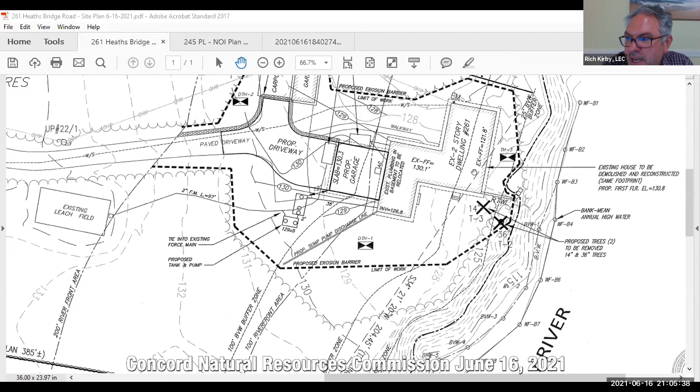It's fine. So, okay, we can make some plan revisions. And Delia, forgive me if I misunderstood you earlier, but it sounds like if that's the only item, we could get this plan in to you by next Friday, and barring any comments on the revisions, we should be pretty good to go for the commission to vote to issue the order on December... July. We're ready for July. I'm sorry, July 7th. July 7th. Okay. Okay, but we need some public comment too.

I have just one more. Yes, please. If we're going to go to that extent, I hate to keep harping on this, but you're pumping water away, what happens at the end of the pipe? Are you putting anything there? Is there any stone or anything to slow the water as it gushes out the pipe? If so, you probably ought to put it on the plan. Yeah, we're probably going to need something down there. We can add a little detail on the plan. I just think then it's done, especially if we're moving towards the field.

Right, because are you excavating something like a sump? That's what I'm saying. What are you doing? Yeah, we'll show a little detail there. I think we probably should have some kind of stone area just to stabilize it, at least in the beginning. Once it's there for a while, it'll stabilize, but we want to get that initial. Yeah, I don't think you need to do stone. It's not like you've got massive CFS coming out of that basement. You plant it. Okay. You should show that it's going to be regraded, presumably.

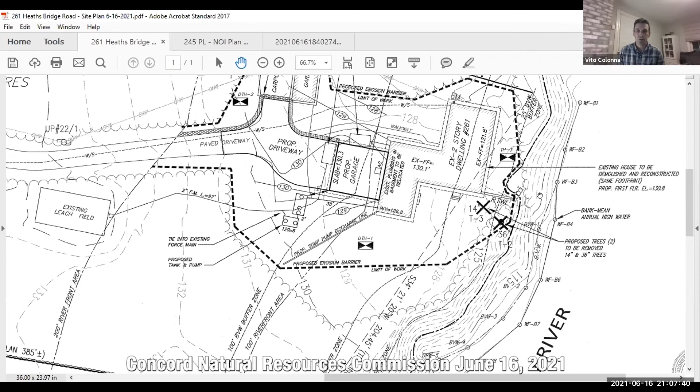Yeah. And where's the existing discharge? It's almost in line with the retaining wall, I believe, off the back of the house. Yeah, like between flags 3 and 4, but at the top of the slope. Right. So that's coming out. Keep it simple. Yeah, they would probably just abandon that one. When you put the foundation in, you just cut it right off. Yeah.

Any public comment in regard to this application?

Anything, Delia, from your end? Okay, so seeing none, we'll continue to the 7th. All right, thanks all very much. Okay, thank you.

All right, let's see. I think we're down to 245 Park Lane, DEP file 1371547. We'll be addressing this. That will be me. My name is Ian Ainslie. Can you guys hear me okay? Yep. Okay. My name is Ian Ainslie. I am an engineer working for the homeowner, Bo Wisage, who is here with his wife, right on the camera that you can see him right there.

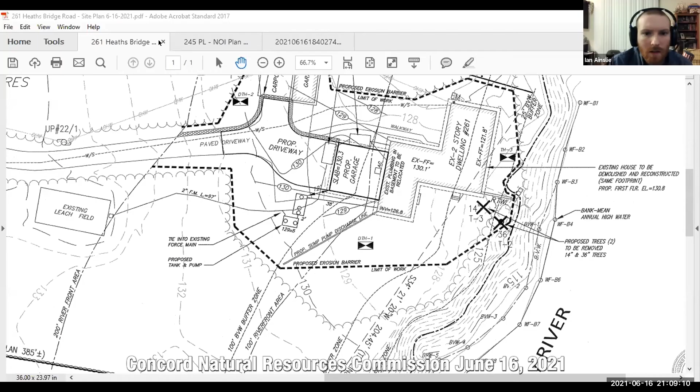This is a permit that was issued in, I think, November of last year for a pool to be installed in the bordering land subject to flooding. And we are here for a request to amend that permit. Since that permit was issued, the homeowners have hired a landscape architect who has kind of refined the pool decking and spot grades and done some landscaping and things like that. And it had changed enough that we felt it was warranted to check with the town, and the staff recommended that we come back in for an amendment.

So the concept is really the same. It's a pool that's in the floodplain in the back. We're amending to fill in more of the floodplain area than we were before. I think before we had shown 0 just because it was so minor at the time. Right now we're proposing to fill in about 200 cubic feet roughly. And we are providing compensatory storage nearby, and I think that's about 600 cubic feet. So we're providing more than we're taking out. But that's really the gist of it. It's the same pool in the same location.

The pool decking before had just been immediately surrounding the pool. Now it extends right up to the house. They're removing an existing deck in the back of the house that we surveyed underneath, and they're going to be cutting out some of that area to provide some of the compensatory storage. And that's really it. It's the same type of project, just a little bit different configuration, a little more filling going on. Okay.

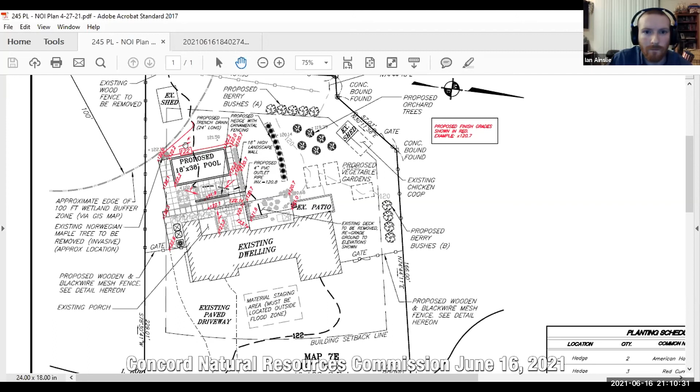I'm just not seeing the compensatory storage area. Yeah, so we're pulling that 122 contour back, essentially, digging that out, making it a little bit lower. And then right in the back of the house where that existing deck is to be removed. Right now, you can see that 122 contour is the bold lines going right into the deck, right in the middle of the house back there. We're cutting that down to, right in front of the steps, 121, and at the base of the steps, 120.7. So those are the two areas that we're taking volume out of. And there is an 18-inch high wall right along that that's going to keep it flush. Okay, thank you. Yep.

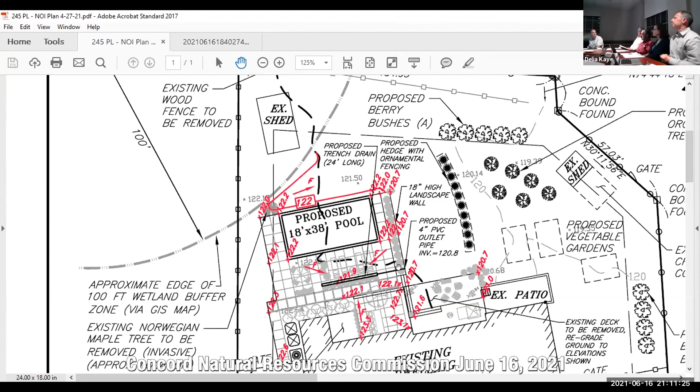Anyone else have any comments? Okay. Any public comment in regard to the application? All right. I believe we have something prepared for a motion. I make a motion to issue an amended OOC to install additional decking around the pool, hedging around the pool, with findings A, standard conditions 1 through 19, and special conditions 20 through 50, on DEP file number 1371547. Thank you, Greg. Do we have a second?

Second. Thanks, Nick. And the vote, Greg? Aye. Nick? Aye. Sarah? Aye. Gary? Aye. And I am an aye as well. Thank you, guys. Good luck with that. Okay, that was quick. Thank you. Welcome.

All right. Let's see. What is the last one we have? I think we're off to the extension request for Dimick, DEP file 137-1394. Good evening. Evening. I'm Alan Dimick, from 79 Concord Road. My co-owner and wife is sitting there, Margaret Dimick. Good evening. Thank you for your patience. My Lord, you've been here all night.